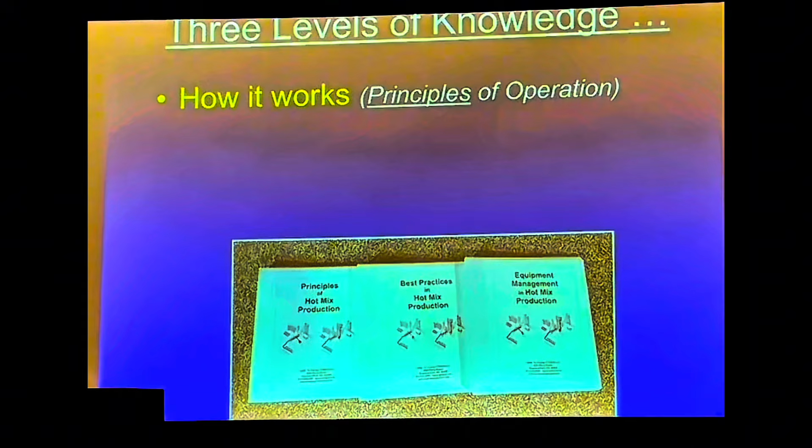The first thing is, how does it work? That's the first book I put together a number of years ago, Principles of Production. This is how we make that machine. But once you get that under your belt, the most important thing is, how do you run it correctly? Same thing is true with a roller or a paver. It's like, oh, that's how it works. But how do you do it right?

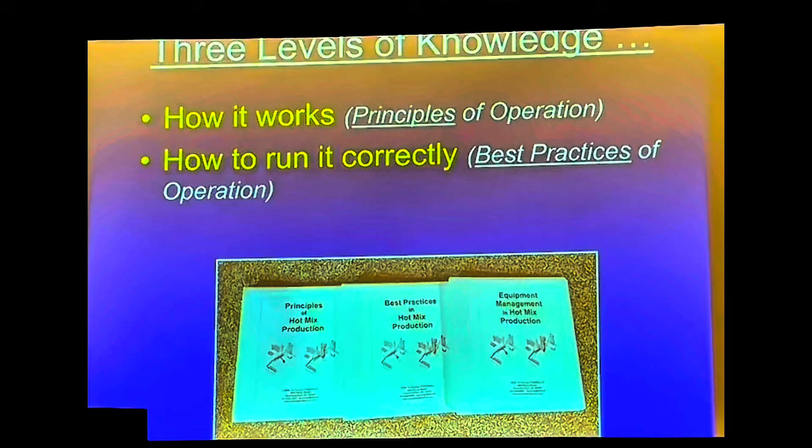What they asked me to do is put a presentation here about our best practices. Brett and I were thinking about doing two presentations. It actually got edited into one, and the second presentation was, how do you maintain it right? Buzz is going to be here talking tomorrow about forensics on pavements. Greg Renegar is going to be here from Astec in the morning on the asphalt stage. At 9 o'clock, I'll be here. I've kind of seen this presentation already about efficiency in production, but maintenance is a critical thing to maintain our efficiency and maintain the thing to operate correctly. If we ignore maintenance, we end up with a quality problem.

I sent Buzz some slides, and he's with the Asphalt Pavement Alliance, and you might know him. He used to be at NCAT at the Test Track. He retired from there. He was working for the Asphalt Pavement Alliance, and he was in New Jersey making a presentation last week about how maintenance can impact mix quality. I thought we were going to weave that into our presentation, so you're going to get a couple shots over the bow later in my presentation on this. Because if we don't maintain our plants correctly, it won't work right.

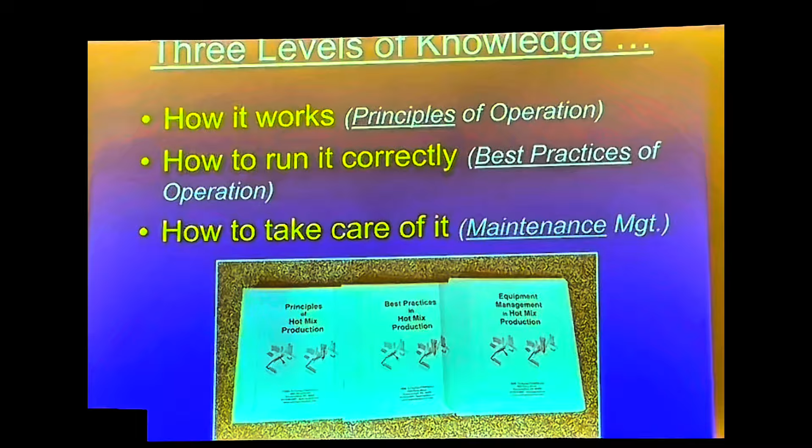So first of all, you've got to know how it works. Secondly, you've got to know how to push buttons right. And the third thing is, you've got to maintain that thing. Otherwise, we're going to have a quality problem. Okay.

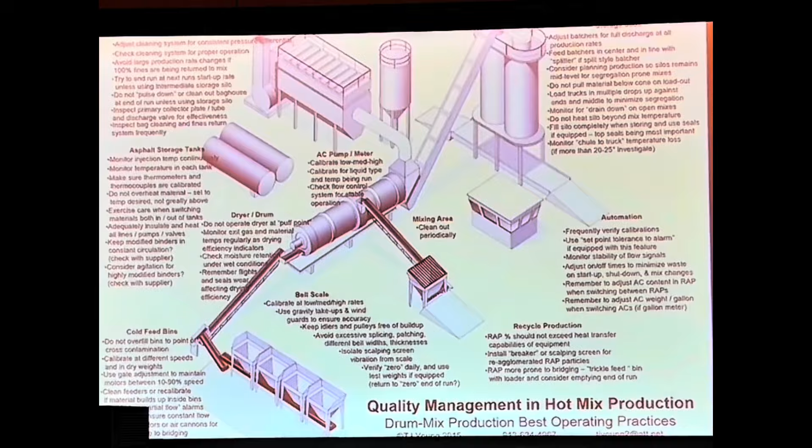Out of that second book on quality management in hot mix production, there's this chart. I think we shared it in years past at the World of Asphalt. These are all the bullet points of making good mix. This is not a 45-minute presentation, but you can see all these bullet points here. You could really spend several hours on this. In fact, I could teach a whole one-day program on quality management and mix production.

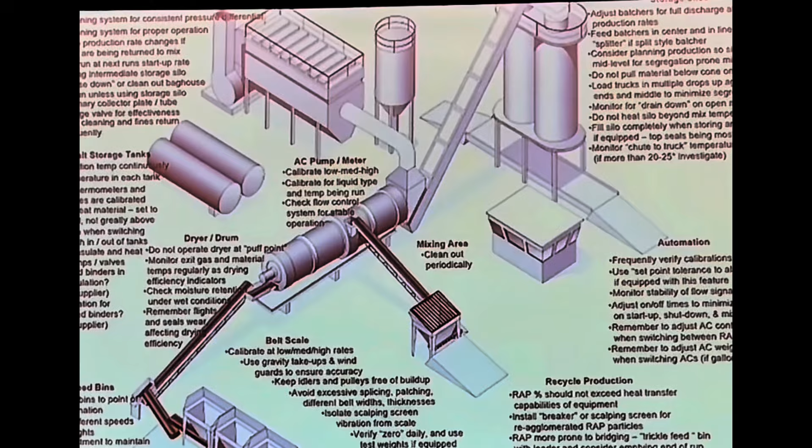Back on slide 3, here's another key thing I think you can take from me. I see one or two equipment manufacturers in the room that build plants. Realize that in mix production, the quality of that production and running that plant right falls into 3 key people. Who are they? They're the plant operator, obviously, but the loader guy is also a key part of quality management.

And the other thing is the person on the ground—also a key part of quality management. Now, this is my crew at one of my plants. I asked them to send me a picture of them, and Rachel, we're not really sure. You're going to say, well, what's the woman doing? We're not really sure, okay? She's been learning how to run the plant. She can run a loader. All of these people can run everything.

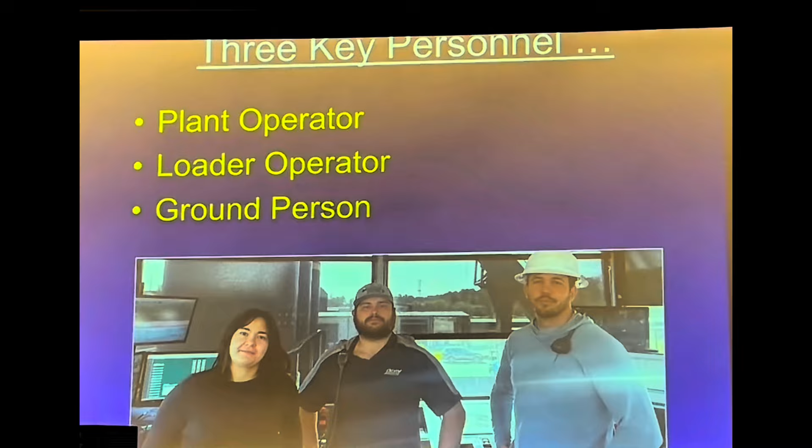We've graduated several women, so there's a plug for women of asphalt here. We've graduated several women through our company. We have a very high percentage of females in our operation in Florida. And they've left, graduated, moved, got married, and they're running plants, running loaders, and even working on the ground at other locations around the country.

This is a really key career. There's only 3,600 asphalt plants in North America. A plant can feed anywhere from 4 to 7 crews. You multiply that and we're looking at over 10,000 paving operations easily, but it's in the hands of those 3,600 plant operators. You learn how to do this right in this program, and—off topic now—but you will never have to worry about working. Most of the people we've graduated, brought up even from 18 years old, are still in the business. It's a good industry. I've been in it for 45 years.

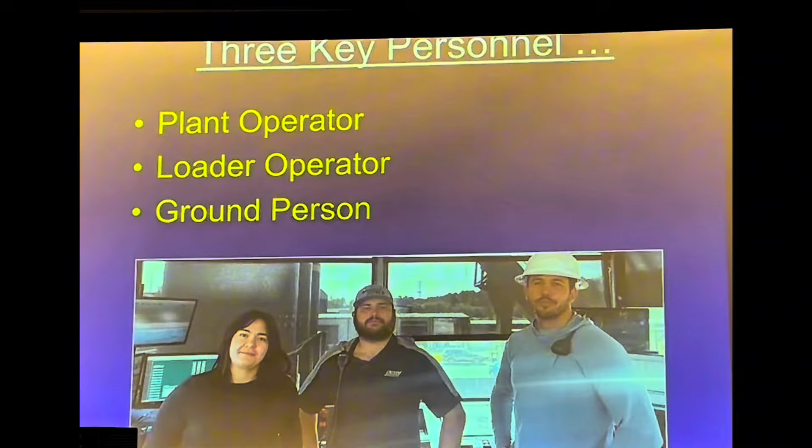Now, those 3 people are going to be responsible for all the best practices we're about to talk about, right? And you can make a chart out of this. The person on the ground is a key person. He's the one watching the machine run, lubricating the machine, inspecting that machine, and he can see things going sideways before the guy at the loader or the plant guy can feel it in his boots.

Standing in a 2-story control house, focusing on trying to load 25 trucks out of 3 or 4 silos—okay, so you can build a case that there's really more than 3 columns. I'm not really sure where the laser is, but I don't think I have one. So there are 3 functions that are critical: watching the plant on the run, what the loader guy's got to play, and the guy on the console. So I call it 'on the console.' He's the mix master. He's the chef, okay? He's the chef.

Loading trucks is a separate function, and a lot of times we use the operator to also load the trucks. I don't like it, which is why we have 4 people in our control houses a lot, because you can't watch the plant run if you're spending all your time serving Cokes in the aisle. And you can spend all your time loading trucks with your back turned, because that's the way we lay these stupid plants out. We have a loading thing over here so we can see the silos, and the burner control of the plant over here so we can see the plant.

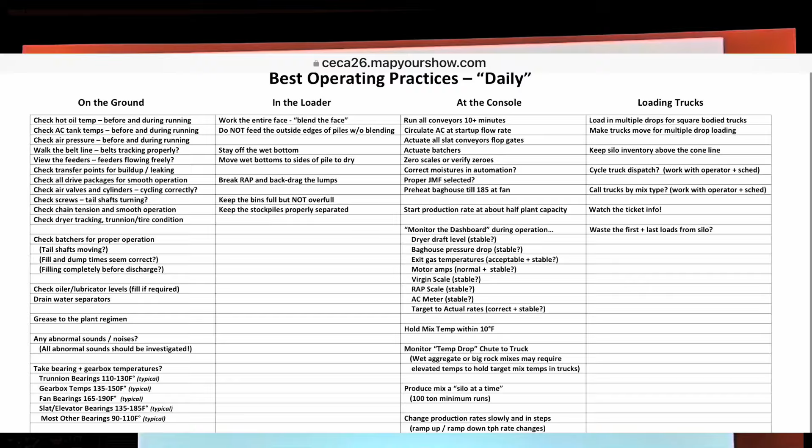So loading the trucks can be really, really hectic, and that might be a key thing you take away from this nugget today: don't get sidetracked by the guy who doesn't know where he's going, isn't sure what crew he's on, isn't even sure this is the right plant, doesn't speak the same language you do, and his credit card doesn't work, right? So you don't have a lot of time focusing on that—that's the real world. And you don't have a lot of time focusing on making quality mix. So we have that chart.

Now, if we make it through 45 minutes to the end of this program—this is an entire other presentation—which is how to take care of the machine.

I try to do everything colorblind here. This is very important to hear. You take this chart on what you ought to look at every day, every week, every month, every quarter, twice a year, and you compare it to your operating manual from Barber-Greene, Cedar Rapids, which doesn't even exist anymore. Almix, we've got an Almix guy sitting here. ADM, Astec, Gencor, Ammann - you're going to see these match.

Unfortunately, in our management world, the people that run these plants - and I've been in this business 48 years, I built plants for 30, I still do, I build custom stuff - they don't read the manual. Not a good idea.

So keep three key things in mind. If you want to keep your plant online, here are three things you can do. Number one, have an inspection program. Forget lubrication - you need to lubricate your equipment, but you've got to look underneath of it, because a machine is going to wear out. Any machine you own is going to have to be managed to some degree from a maintenance standpoint, or you're not going to have a functioning chainsaw.

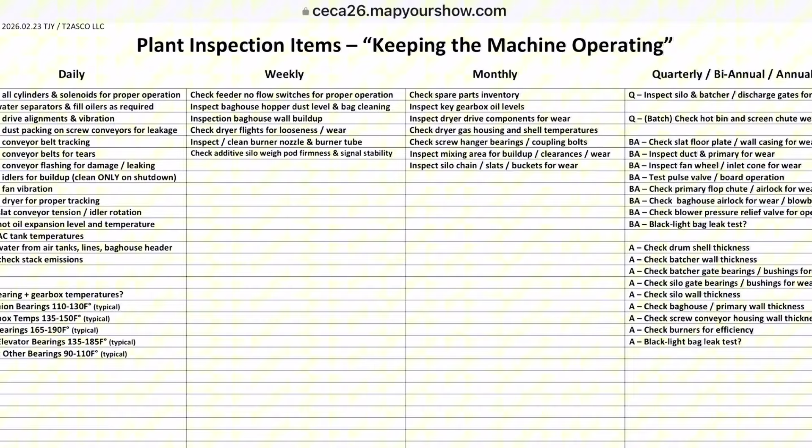Now let's rip through some of the key points at lightning speed on quality management. Start with the rock - the best producers keep the rock properly separated, no cross-contamination, blah blah blah. I don't have time to enumerate these points, but you know this is true. This is what you need to manage.

When things go wrong - and I have a whole other program on this, I think we did it a couple years ago - when things don't work right, it's usually because one of the basics got bent. And frequently, in my experience in this business, it's not just one thing, it's two or three things. So this was wrong, that was wrong, boom - we've got to dig up a mile and a half of road.

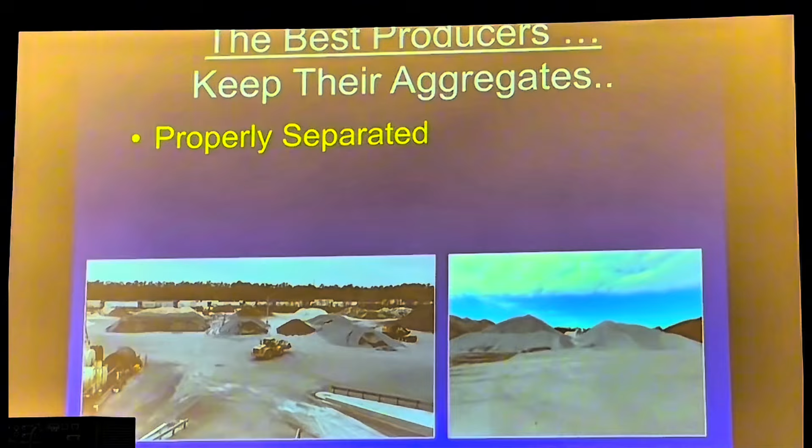So the best practices here are: properly separate the rocks, keep them free of contamination - pictures show how to do that. You want to be on a solid draining surface for a lot of reasons - you don't want contamination from the ground, and you want to get water out of the material. Every 1% moisture reduction is going to be 10% on your fuel bill.

Your fuel bill is a million dollars a year - that's $100,000. Shout out to NAPA, who really sponsored me here. Is it QIP 132 we just did? 132 or 133? So there's a whole publication you can go downstairs and buy, QIP 132.

It's about energy management in your plant facility. Greg's going to be talking about this, I'm sure, tomorrow morning, and some of the slides I have here will dovetail on what he's doing.

Now, when you're feeding the plant, after you've kept it all separated and stockpiled, work the entire face - key point. What that does is it averages out the gradation inconsistency, because you're going to find the gradations are inconsistent. The question is, how inconsistent are they? In other words, what's the standard deviation of our control system? That is critical - here's another soundbite to take with you.

You can't make good asphalt the way we make asphalt in North America, where over 95% of high dollar owner agency work is produced through continuous mix plants. We blend rock, we blend asphalt, we dry, we heat, we hit target temperature, we put it in a truck and pray we didn't segregate it. That's the way we do it in North America. They don't do it in other places around the world that way.

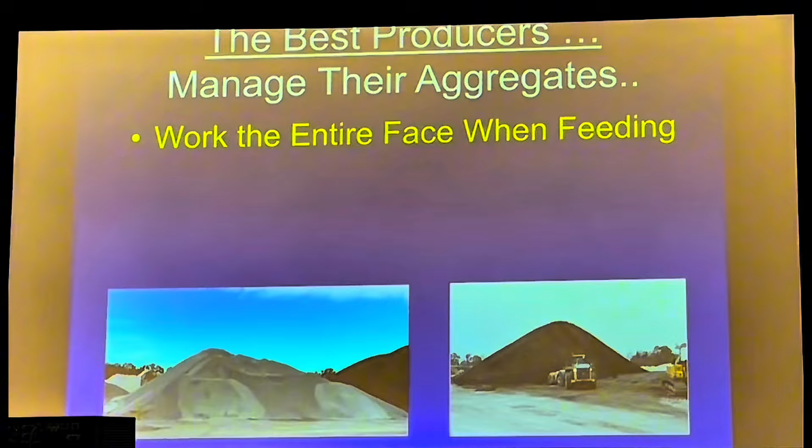The loader guy's responsibility is this, and that's the column in front of you, because I've got to go fast here. So you work the whole face. You make a blend pile if you need to, and what you do is average gradation inconsistency when you make a blend pile. You feed dry material to the plant.

There's an adage: stay up 12 inches. Here's a picture of Papa over here trying to stay up half an inch. I shot that early in the morning, and you only have 1 or 2 loader buckets in there, but he's up about 12 inches on that right-hand picture. You can see the wet line between these 2 rock piles, the 1/4 inch minus and the 3/8 stone. You can see the water, the visual wet part of that pile, where the water is sinking down. You don't want to feed that into your plant.

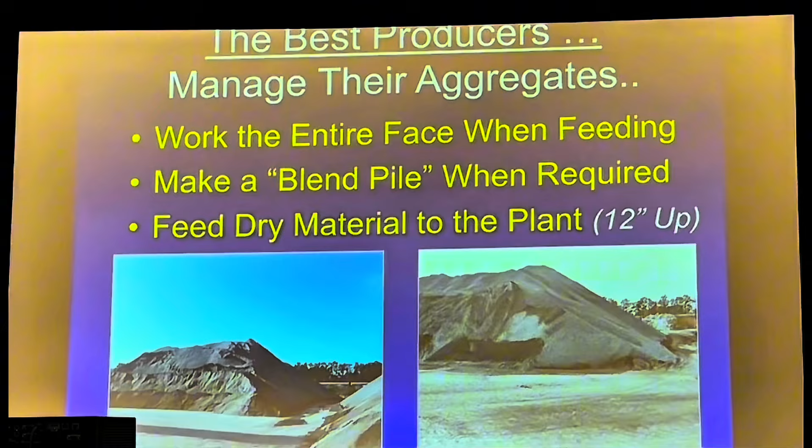This allows us also to control temperature, as you will see here. So the best producers know their aggregates.

Now there's a little sidebar comment here. I know I sound like I'm preaching. Number one, I love asphalt, I think it's a great choice. But I have not learned this myself, this is not my own knowledge. I've been to hundreds and hundreds of plants in Oregon, worked with people, developed programs with them, and helped them troubleshoot issues. This is what I've learned from people that don't have problems. This is your peers being successful, this is what they do. This is not my idea. This is the real world. This is how it works.

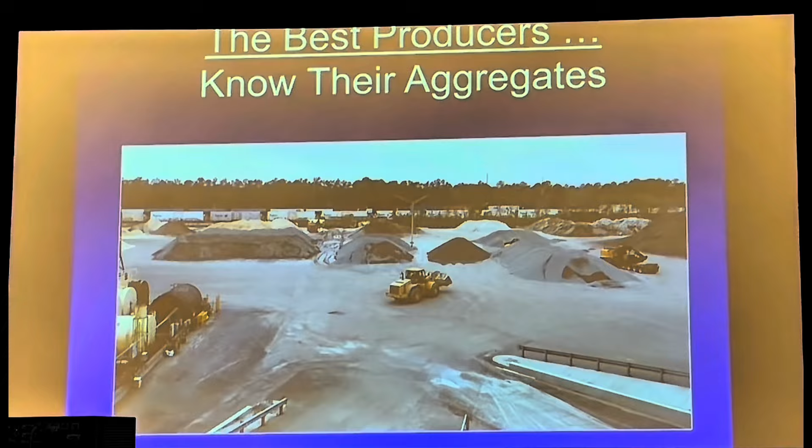So the best producers know what rock they have. Gradation is going to vary. They test material as it comes in, and they separate material into cells. In other words, you use the material into your feed bins, then you know what the gradation is. You don't take brand new material in, throw it in front of the pile, feed it into the plant, and find out you made a bad mix, because somebody changed the screens at the quarry, and the screens are fatter now, and the holes are smaller, so the rock just fined up, right? That's what happens. That's the real world.

You know, just a little funny story on that. We take rock into Florida from Nova Scotia with one of the big aggregate firms, because there's no rock left in Florida, but a couple of quarries down around Miami. And you know, they don't ship in the winter. When are you going to do maintenance on your quarry? In the winter, right? When are you going to change screens? In the winter. So I call Sherry up and I go, hey, there's a ship coming, 60,000 tons of material, you're going to unload it on a wharf wall. And I'm like, you know, and she goes, and she just starts laughing.

She said, I was thinking about you this morning. And I said, okay, I'm thinking about you, what do you think we ought to do? She said, I think we better test this rock when it comes in, because I'm pretty sure it's going to be finer than frog hair, you know? And it did. The control sieve moved 14%, but it's still in spec, because our spec band on aggregate's that wide, and our spec band on asphalt's about this narrow. That's the real world. And I said, yeah, I drove by the rock, the wharf wall, and you got some space, I think you ought to put it in another pile. The half-inch rock moved 14 percentage points between the old pile and the new pile.

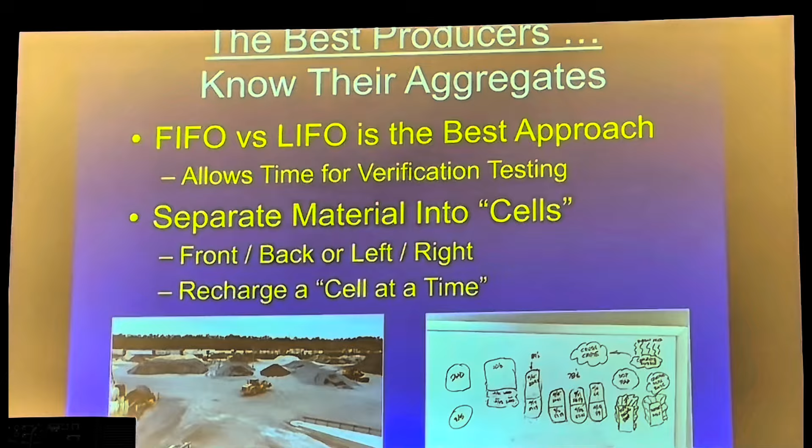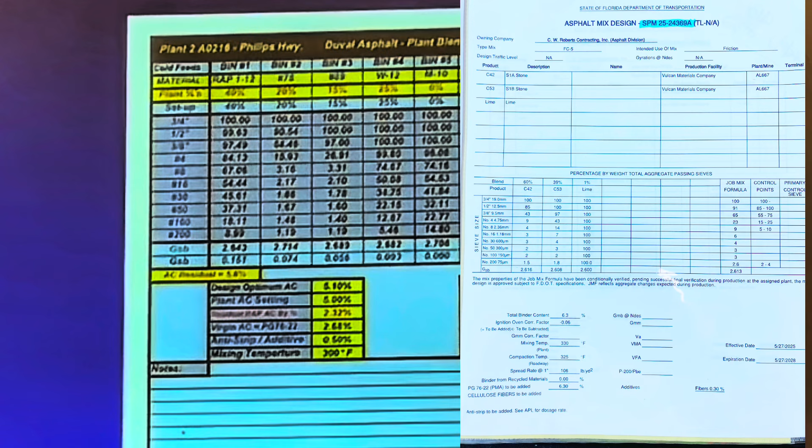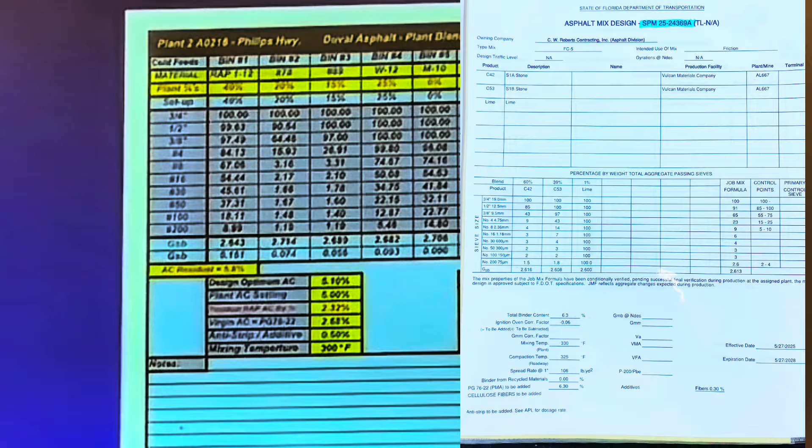Dave and I have an argument about it all the time. I say, Dave, I think we ought to move the blend this way. And he's the mix design guy. Well, why don't we make mix? I go, well, that's a great idea. Let's go ahead and make mix and then find out I'm right. I hope it doesn't affect our pay factor because we're in the bonus stage. Oh, yeah, well, maybe you're right.

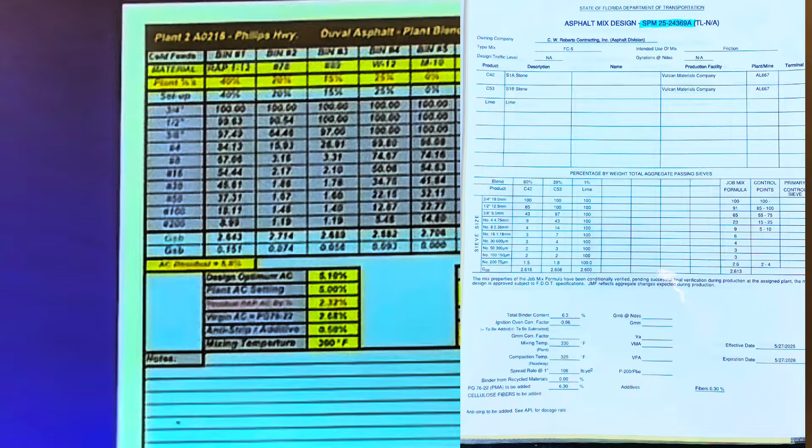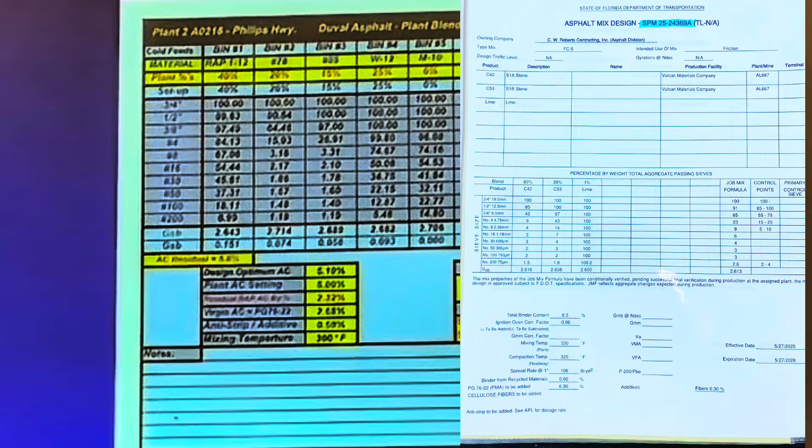You know, because the old way of doing it, because he's an old fart, I'm an old fart, the old way of doing things is you just make mix and then figure out what's wrong with it and then you just adjust the plant. You know, there's an awful lot of plants that haven't been calibrated in 10 years.

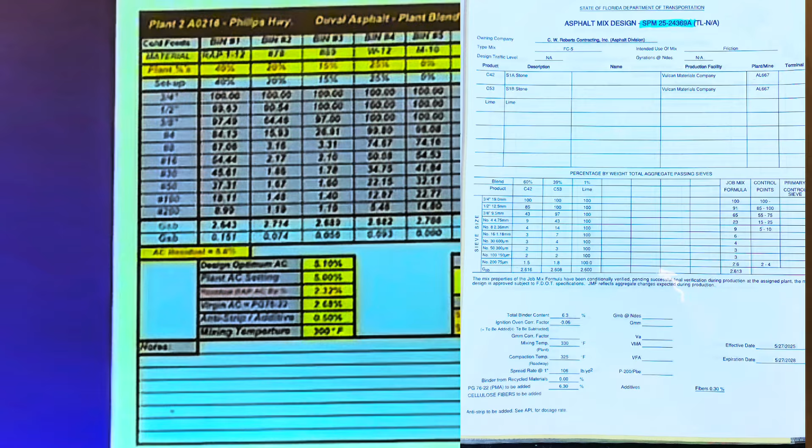This guy's like, what? You start visiting plants and you have a mix problem and you just ask a simple question, when was the last time you checked your cold feed bins? When did you calibrate your cold feed bins last? I don't know. You know, when the computer went out, we had to change the motherboard. You know, they just look at the mix and it's too coarse, so we fine it up, and it's too fine, we coarse it up. That's the way it still goes on in this industry.

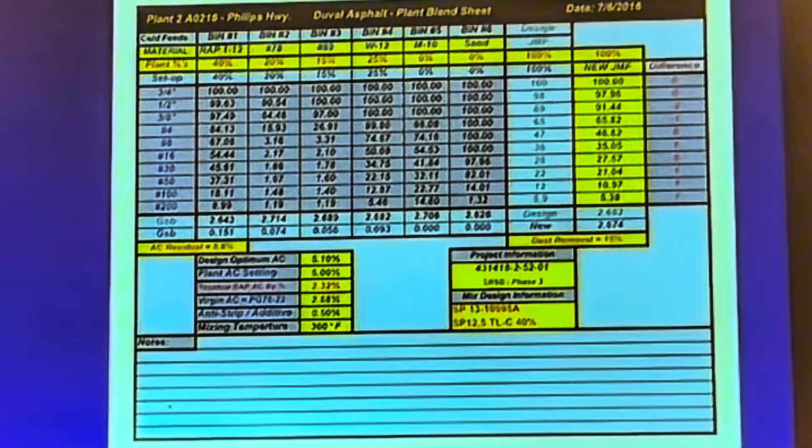That's why you're here at ConAgg. You don't want to be that way. Best producers don't do this. They know what it is before they feed it into the plant. I need to move on.

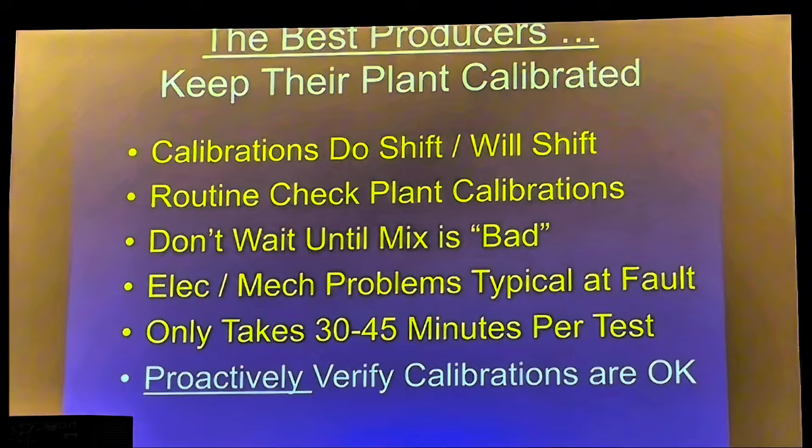Also, calibrations are going to move. They do shift. So the logical idea is to check your calibrations every once in a while to see if they've moved on you. A lot of people don't do that. Best producers do. Okay? So routinely check your plant calibrations. It's on your chart. Don't wait till the mix is bad, because usually it's an electromechanical problem. It's usually the fault of a machine. It only takes 30 or 45 minutes to test it, so being proactive is a great idea.

Picture of that happening. If you're feeding material out of stacking conveyors, I left these in. I wish I could have taken them out for time. But the thing is that they're going to segregate. They're going to segregate by their very nature. Coarse is going to go to the far end of the pile. The fines are going to stay underneath the conveyor.

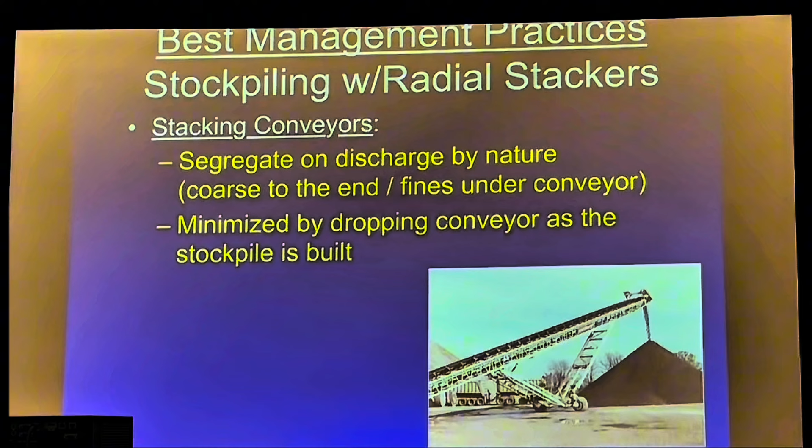So we feed perpendicular to the feed angle. So the conveyor's loading north and south. You're going to feed east and west out of that pile, and you're going to make a blend pile before you feed it into your plant. You know, that's best practice. And you go out there, ConAgg here, and there's billions of these programmable stackers out there to look at. Okay. Now, you minimize the problem that creates by feeding perpendicular to the feed of the conveyor.

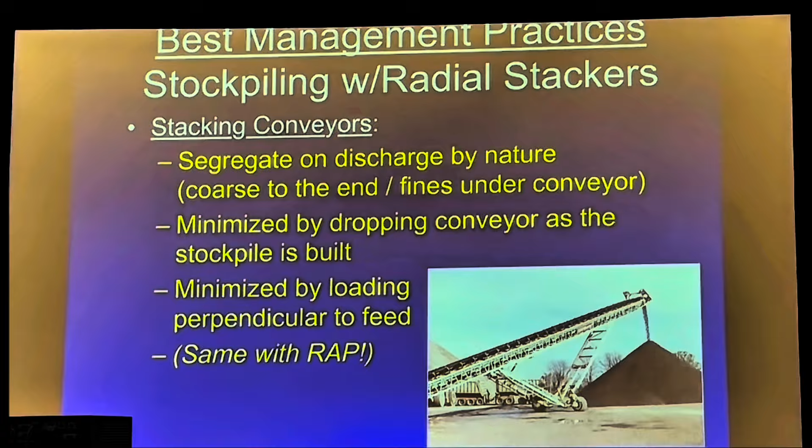Same thing is true with RAP. I left these slides in because most of us are running a very high percentage of RAP now. Asphalt is 100% recyclable. You are your own quarry when you process your RAP. So you have to manage your stackers and your equipment just like you were producing aggregate. As Kenny Monolith used to say, it's an urban quarry. We're an urban quarry. Okay?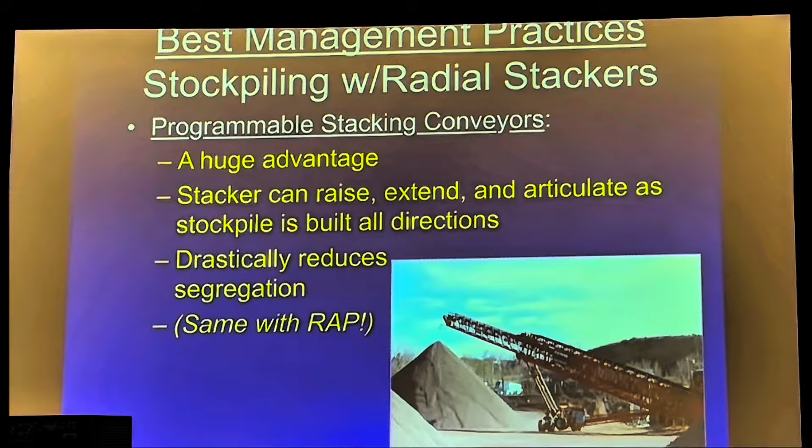Programmable stacking conveyors help because it's a huge advantage for a lot of reasons. You can raise, extend, and articulate it. Actually program a stockpile, minimize your segregation. It only costs you about $500,000. Okay? Drastically reducing the segregation is great. Same thing is true with RAP. You can use anti-segregation head pulleys, which act like little baffles. That helps a lot. It's a big advantage. Again, the point is that you are managing the segregation issue.

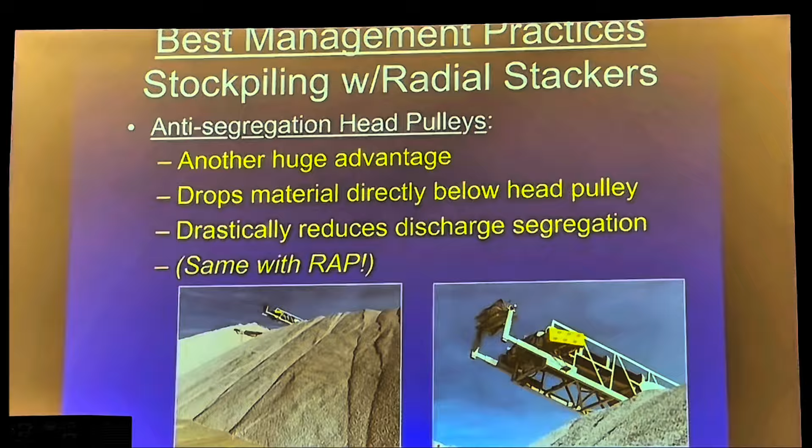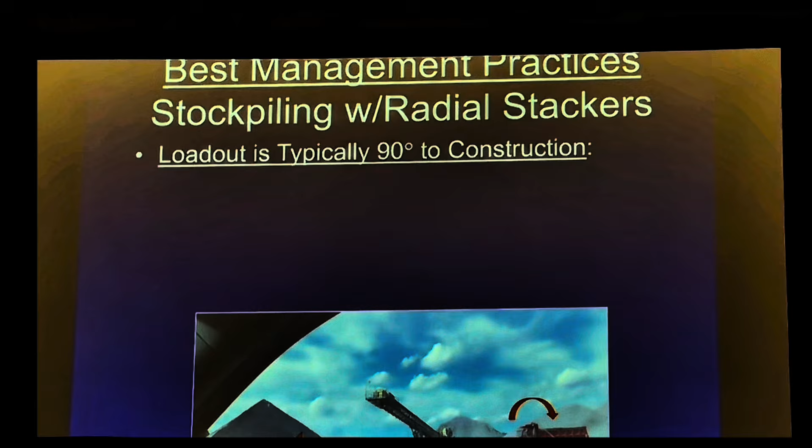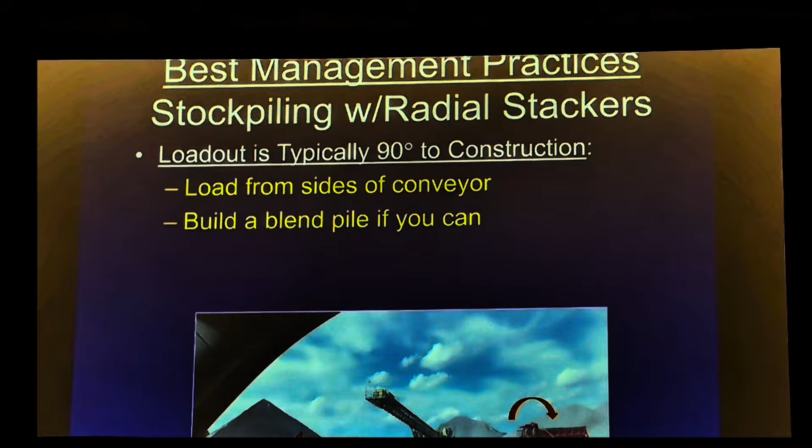So here's a picture of a rock terminal. You can see this programmable stacker is moved out of the way. They've fed that pile this way, and the loader guys load trucks to go to an asphalt plant, working that entire face. So again, working the face, blending the material, chucking it in the truck. Okay? Best practice. Same thing is true with RAP.

So I threw these slides in because here's one of our plants. There's the RAP crusher in the back, it's red. There's the stacker. You can see the direction they're stacking the pile. They're going back and forth like this, you know, as you're looking at the screen.

Those of you who are listening to this can't see this photograph, or maybe you can, I guess you can. But it's going to be in the foreground. This thing is worked back and forth, and then he's laid another ridge in behind that. So the loader operator is going to come in, and see how he's working the face perpendicular to the feed angle. You can see it right there in the picture. Okay, that's best practice for that.

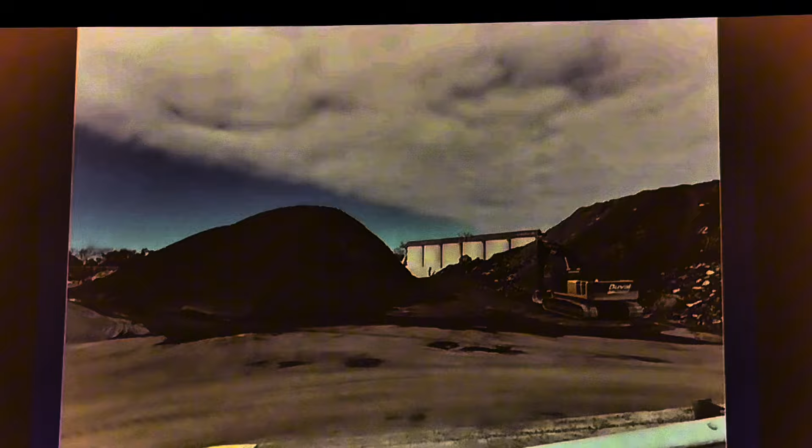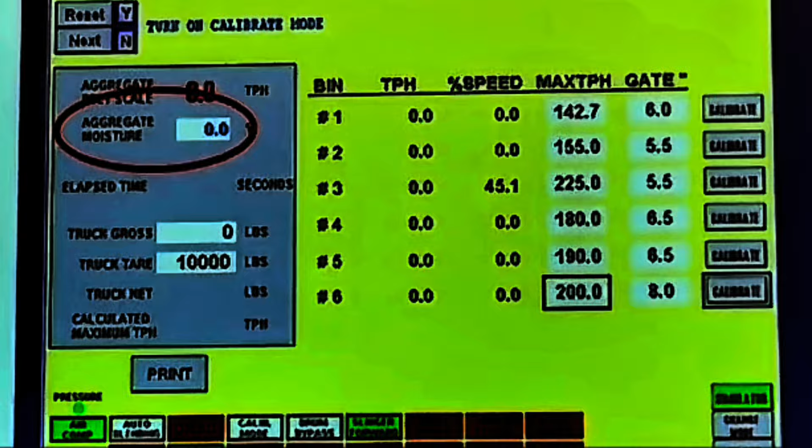Good idea to have dividers to keep from cross-contamination. Best practice: calibrate your feeders and dry weights at different speed ranges. This is important. So if I had to edit these slides down even more, I'd just say multiple point calibration. 3-point calibration should be your minimum on everything. Cold feed bins, belt scales, asphalt meters, everything. Mineral filler additive systems, whatever.

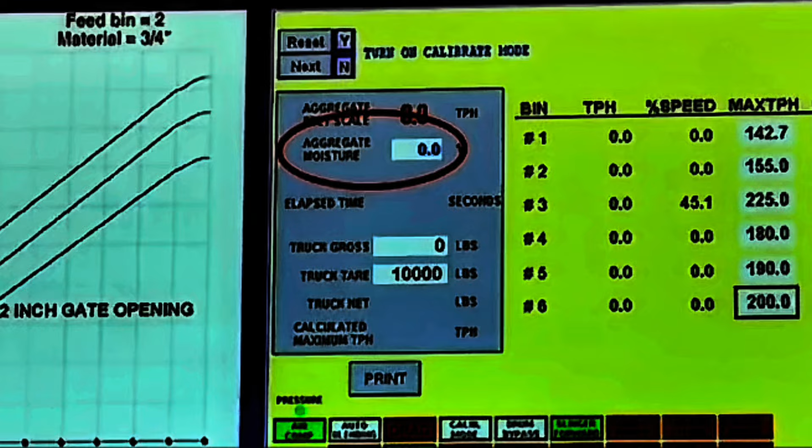Just go out and ask all those manufacturers if 3-point calibration is a good idea, and they're going to tell you yes. Best producers do 3-point calibration. Other people just do 1-point calibration because it's usually linear, so why bother? I've heard this out of the mouth of people that work for me in 7 plants. We don't do that because if 25% feed gives you 25 ton an hour, 50% feed gives you 50 ton an hour, 75% feed gives you 75 ton an hour, it's a 45, it's a linear function. And so the computer can interpolate between those points.

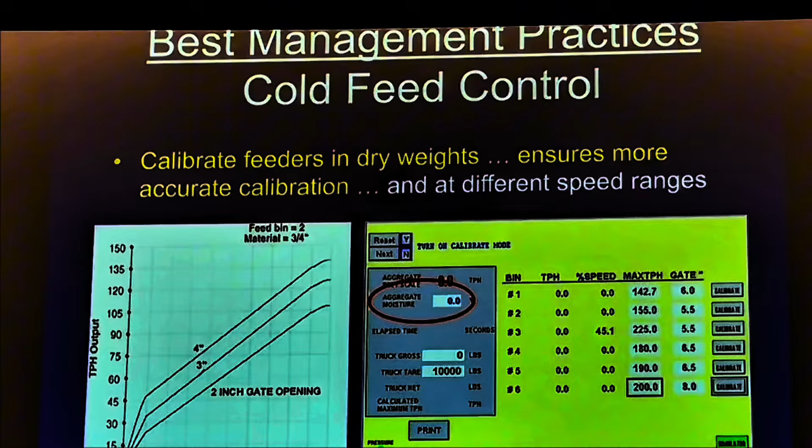A lot of computer systems, when you calibrate it, give you a graph. Those are the ones I like. If that graph is not on a straight line, you've got an electromechanical problem. Go fix it. Because it might be that you run the plant right where that hiccup is, and it's going to affect your mix. Proven linearity on all of your mixing ingredients gives you good mix. And I'm spending some time talking about that because there's going to be slide after slide coming up on belt scales and feeders on the same point. I can skip over, okay?

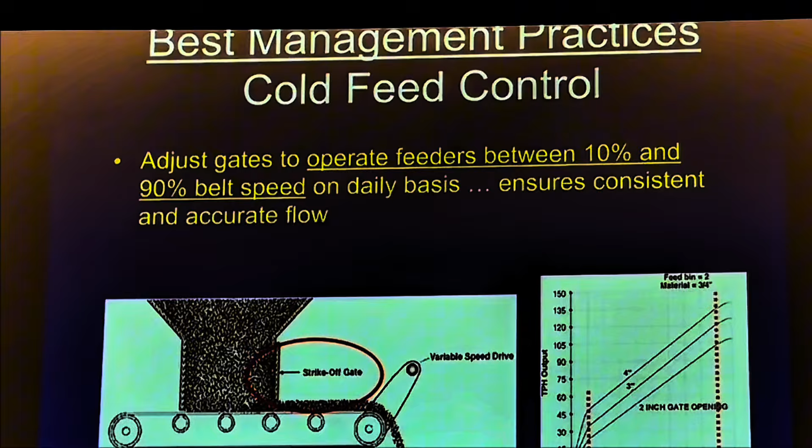Try to run your operations so that you're operating everything between 10 and 90% speed. Things don't like to go super slow, and they have a tendency to flatten out on the high end. It's better to stay in that linear range, which is what you see on the screen. Okay? Best producers do this. Make sure your on-off times are set right in your computer so your mix, when you fire it up and it comes off the end of the belt and goes through the drum, it's good. Okay?

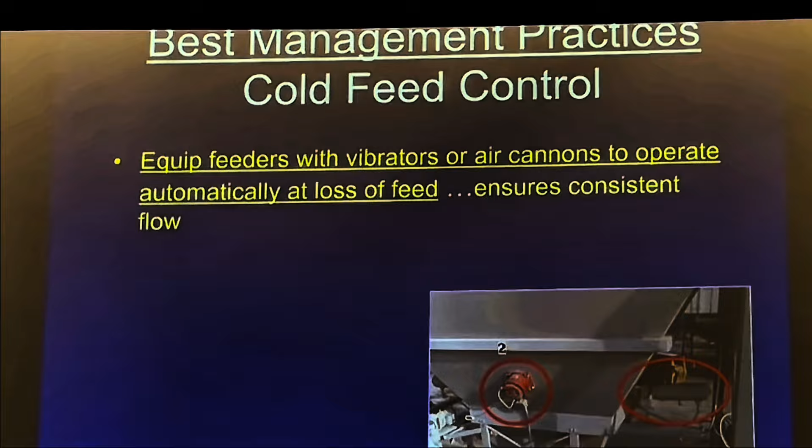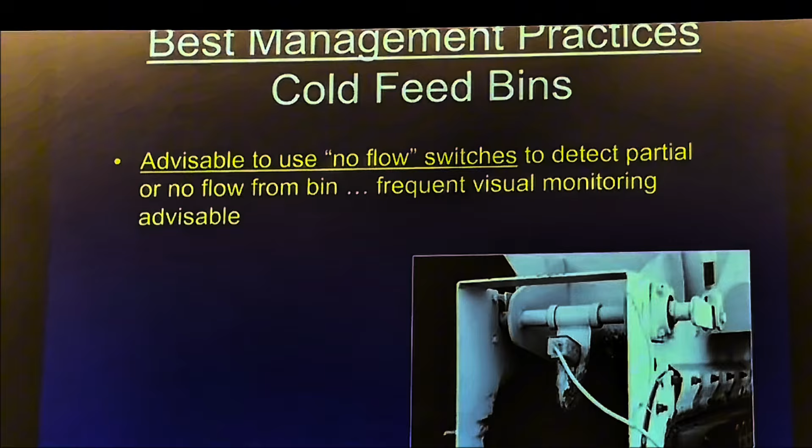Vibrators and air cannons in case you have loss of feed, making sure your no-flow switches work. Whose job is all this? The guy on the ground. The guy on the ground is going to watch the feed and keep an eye on everything, and the operator, because if he hasn't turned off all the automation, he can see it working correctly. Daily monitor the feeder flow just to make sure it's working right. That's the ground guy's job.

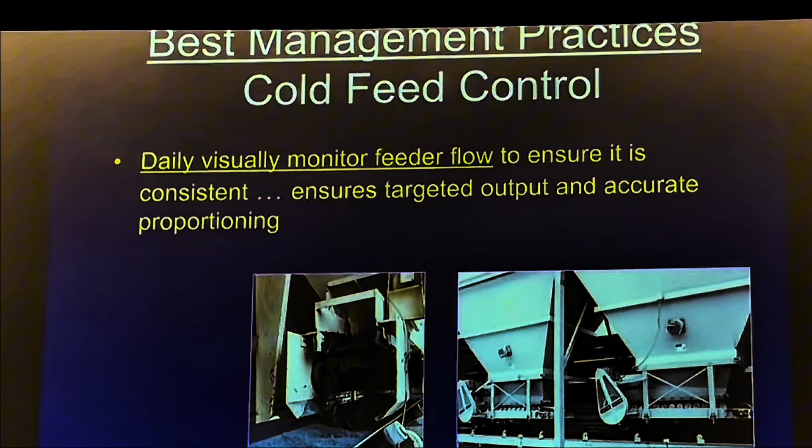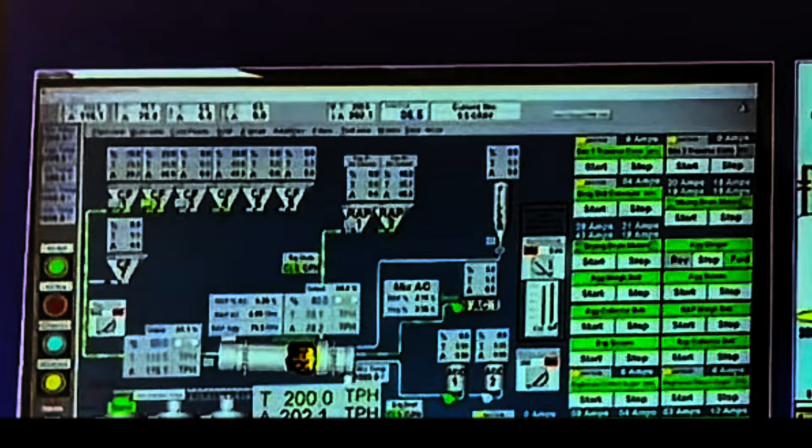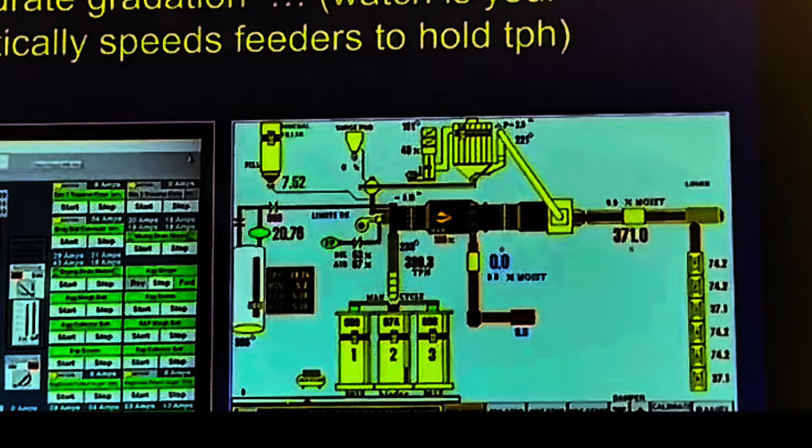Use set point timers to alarm if the control systems have it. I got news for you. They all do. You look on the left on this screen here, they're running that plant at 200 ton an hour. The green thing says 200 ton an hour with a T, target. The actual is 202.1 with an A, actual. If you put in 200 ton an hour and you get 220 ton an hour, you've got a problem. And the lab's going to call you up and go, your mix is not good. Okay? And so they're there for a function.

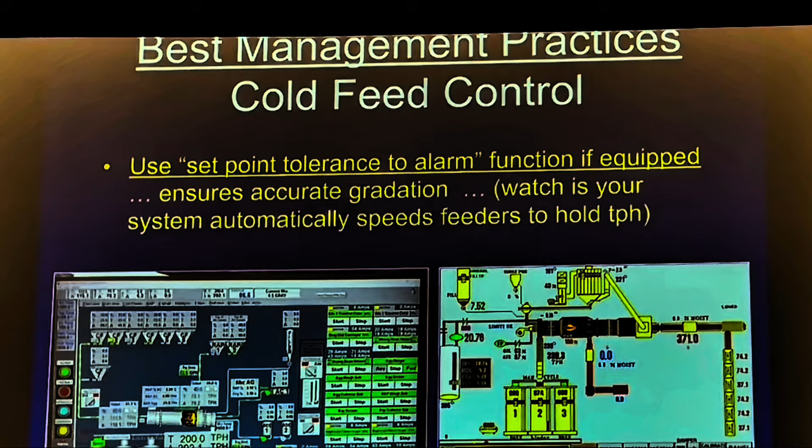The reason I'm stressing it is because operators like to turn these off. When I set up, I fired most of the people that I inherited when they asked me to run the company. One guy signed his death warrant the day that we had bad mixing and I went to the control house, and I'm looking at the screen, the alarms are turned off, and I'm like, your speakers are unplugged. He goes, yeah, it keeps barking at me and it bothers me. I'm like, really? So I go over to the alarm screen, and there's 15 alarms in the alarm log. I'm like, dude, they're there for a reason. And I'm stressing this point because it's very common. I've audited over 600 plants in detail.

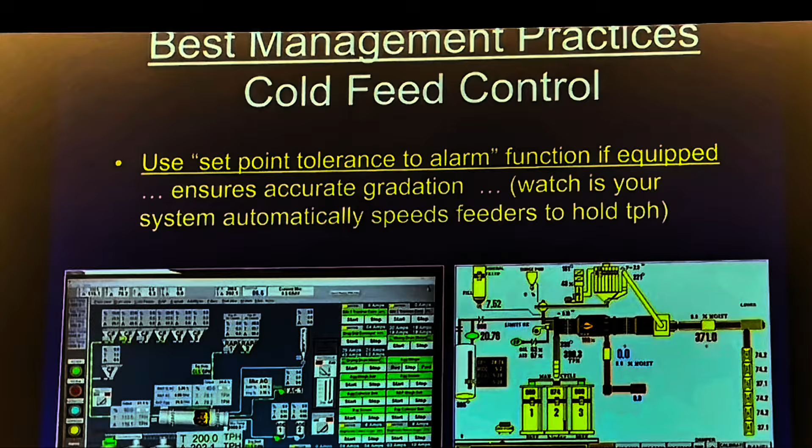I have a 45-page document that I do this with, and I've helped other companies build those inspection programs. We internally audit once a year, and it's very common for people to turn this off, and it just leads to it not working right. Okay. So good producers use set point tolerance alarm. They check their feed bins frequently.

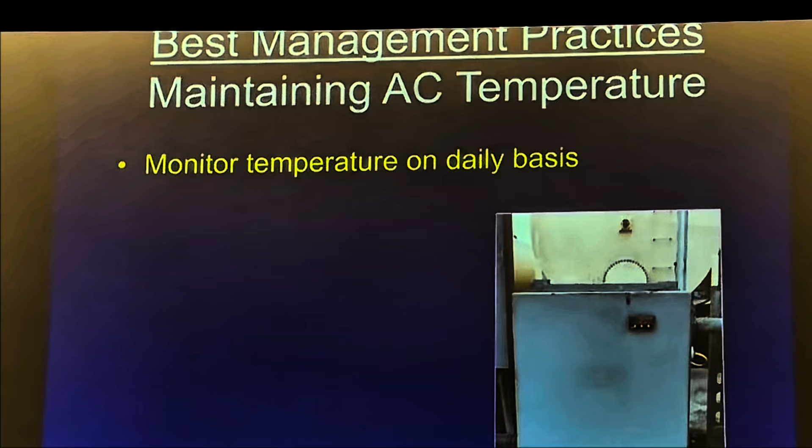Storage, key points: monitor your temperature. Whose job? Ground guy. Monitor the temperature in every tank. Here's a picture of a tank, and on the left of the screen it shows the actual temperature. The other picture I had there is the hot oil heater system, an independent verification of the hot oil temperature external to the heater system, so that you know the heater system is set here and the actual hot oil temperature that's going throughout the plant facility is what you want it to be.

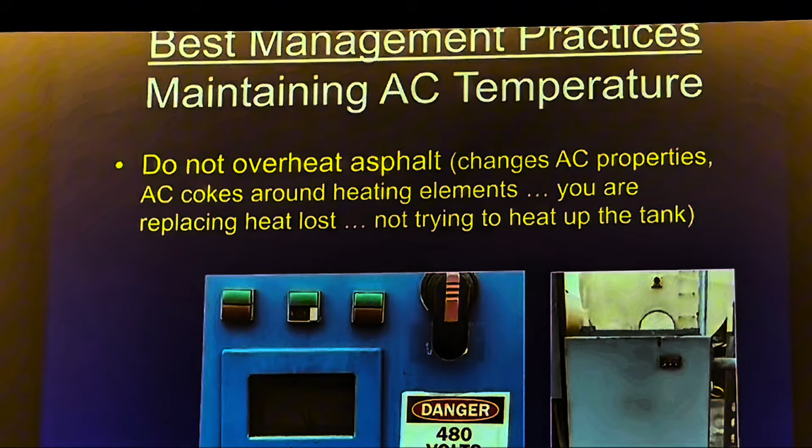Because we have to maintain liquid asphalt at a proper temperature to get proper coating. So you bring aggregate to the proper temperature to get proper coverage. Asphalt control then is two things. Write this down if you haven't got this memorized. Asphalt only comes from two things in continuous mix plants: belt scale and a meter. Okay? Gradation is a calibration thing for the feeders. Asphalt content is belt scale and meter.

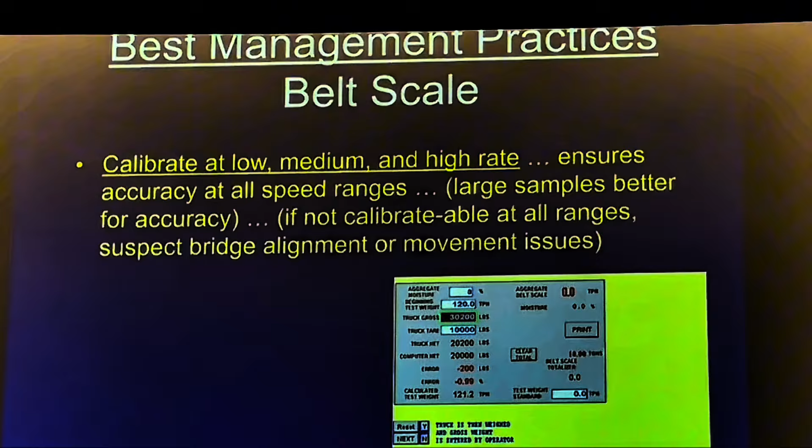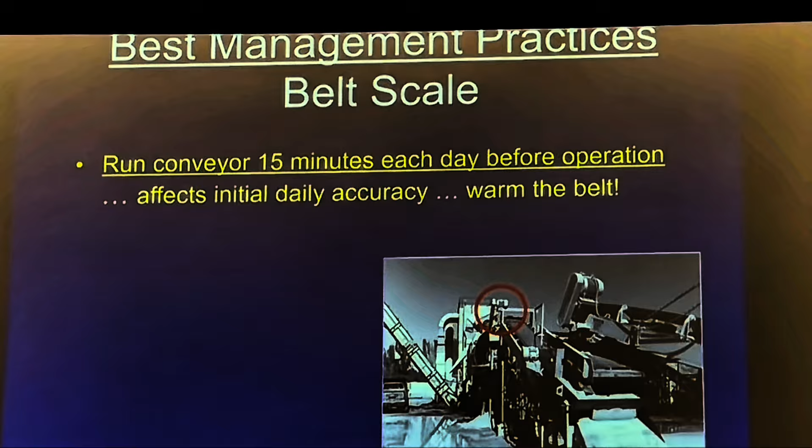Okay? So there's some best practices on the scale. Keep pulleys clean of buildup. Run your conveyor every day. Why? The speed changes. You know how long a 100-foot belt stretches in the first 20 minutes of operation? Over 8 inches. Whoa, that's why we have gravity take-ups to maintain a zero. So we want to make sure we got a zero when you start in the morning, and you want to make sure it goes back to zero.

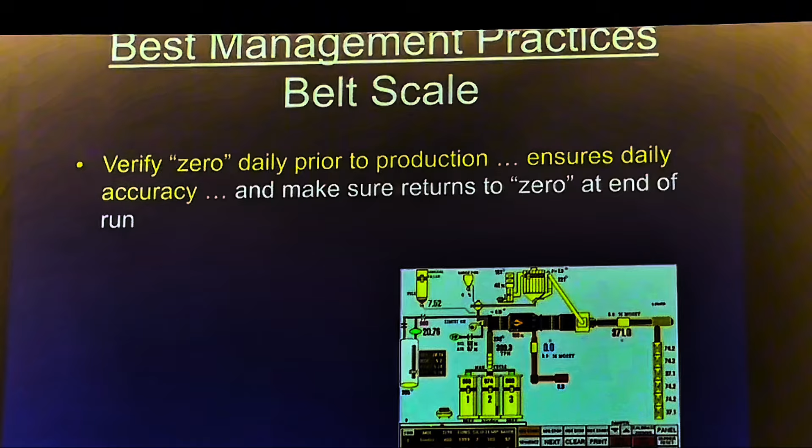If you get buildup on your belt, it doesn't go back to zero. Your asphalt's going to be high throughout the day because it's measuring the weight that's not going into the dryer. Very common problem, okay? And it's part of our troubleshooting series. Use test weights if you have them. That tells you your scale's working right, okay? And recheck your calibration. Low, medium, and high rate again, all right?

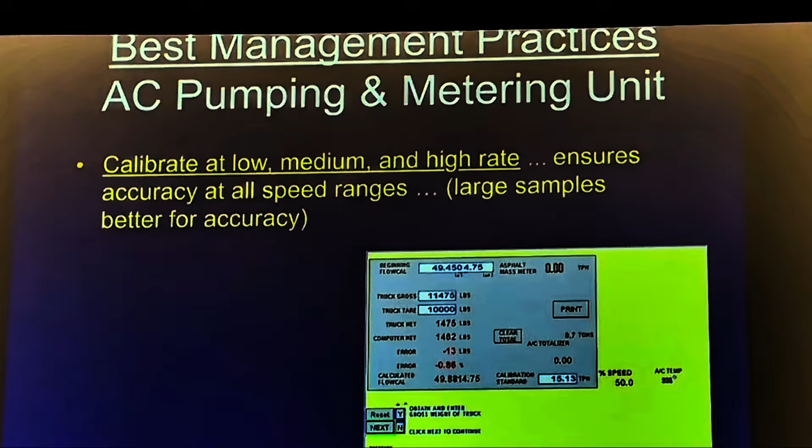So this is back on the pumping system. Again, low, medium, and high rate calibration. Make sure it's linear. You check your feeder calibration. Frequently recheck it. And realize that different asphalts go through the meter differently and may have different calibration factors. If you're not plugged into this one point, then I don't know what you paid to come into this room, but just multiply by 10. That's the value of that one thing.

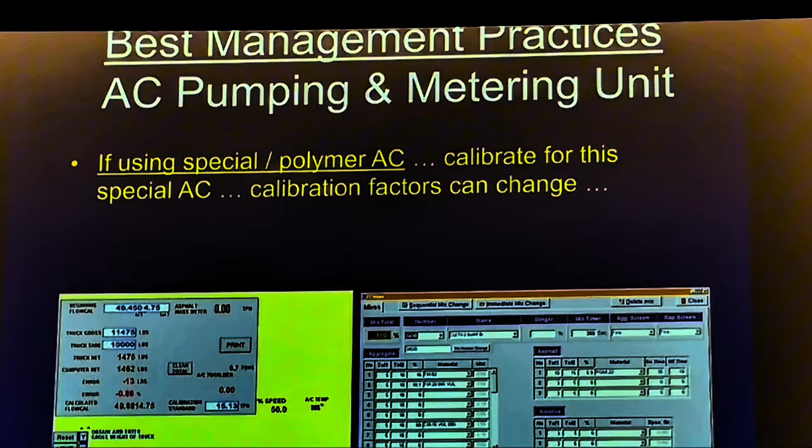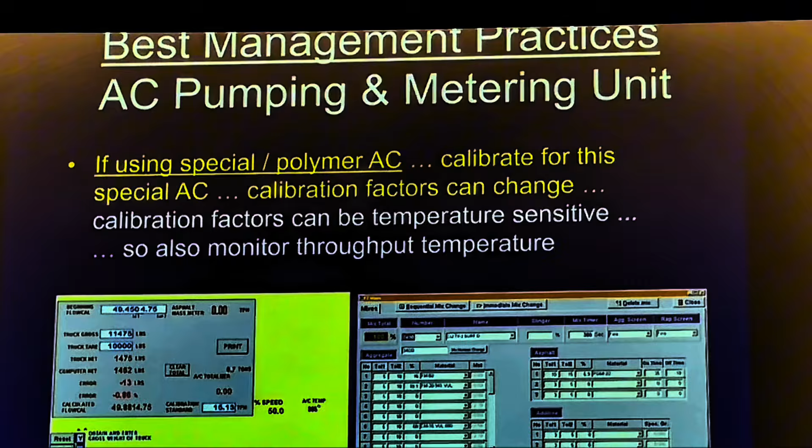As we go to high polymerized asphalts, as we change our polymer in our binder, it actually changes the way the meter measures. Okay, and so you need to be savvy to that. You want to check your meter calibration for the liquid you're running at the temperature that it runs, because they're frequently temperature sensitive. In other words, you take a high poly binder and you calibrate it at 285 and 325 and 345, and you're going to get 3 different calibration factors through that meter. So you better know that if you're trying to control AC within a tenth and a half, which is what all of us are trying to do, right? These are best practices.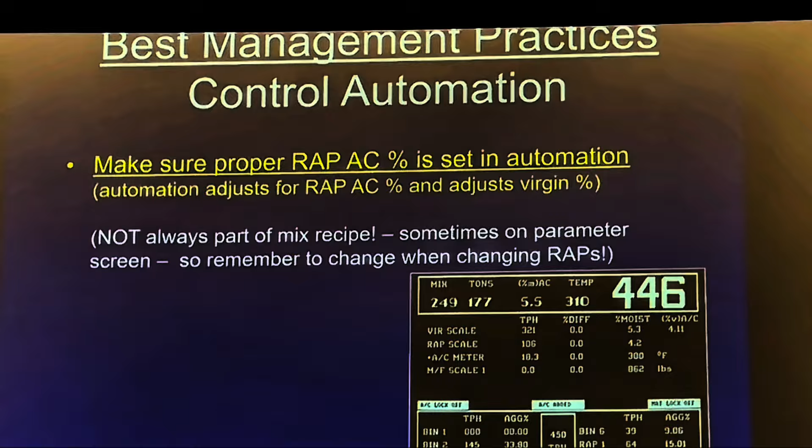I said it wrong. So the AC will change in different fractionated RAP piles, and sometimes you have to tell, depending on the automation you have, I change piles and the asphalt contents differ, because it's going to weigh the RAP and it's going to say, this is how much moisture is in there. It's going to take it off, and this is how much AC is in that black stuff to control the other liquid. Target to actual again is really important. Stability of the flow signals is really an important thing. This is an example. I'd love to spend time with you on that, but we don't really have time.

If you look at the bottom line, this is a simple technique you can do yourself, which shows you on this example that the asphalt is moving in the mix, actually moving during production 3.1%, because the RAP scale has got built up on the head pulley, and it's moving 9%. The virgin scale is not. You clean the RAP pulley off and your asphalt stabilizes. It's all hula dancing together.

So these are the things that producers that are good at what they do keep an eye on. If you look at the chart in front of you and look at the operator, you're going to see these points listed. You go through this knowledge, and you go, oh yeah, this is something. You look at that chart and say, just do these things, and we're going to be okay. And when it comes to maintenance, just do these things, and we're probably going to be okay.

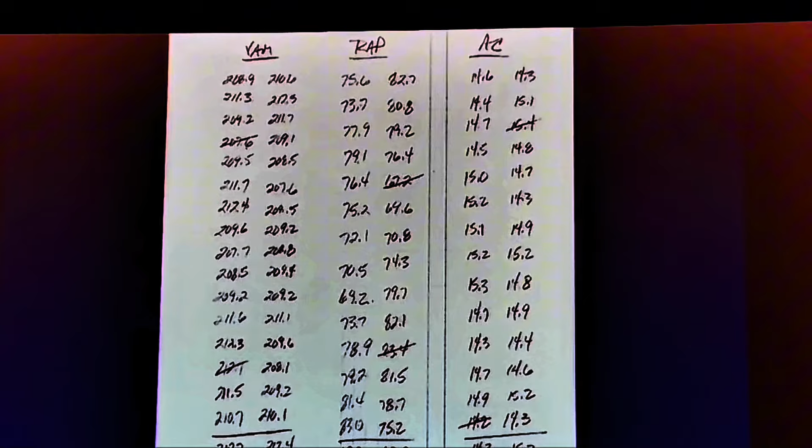I have no idea. He's looking at his watch, where I am.

Now, don't bounce between mixes rapidly: three loads of this, three loads of that, over and over. These are continuous mix plants, they're supposed to be run continuously. It takes time for the plant to level out. You're going to have to stagger your start times for different mixes. Try to produce a silo at a time, at least 100 tons at a time, because there's going to be a crossover mix. You're not going to shut the plant off, you're just going to switch mixes and keep going, silo to silo to silo. These things are designed to run continuously. Run them continuously, and manage your schedule so you can do that.

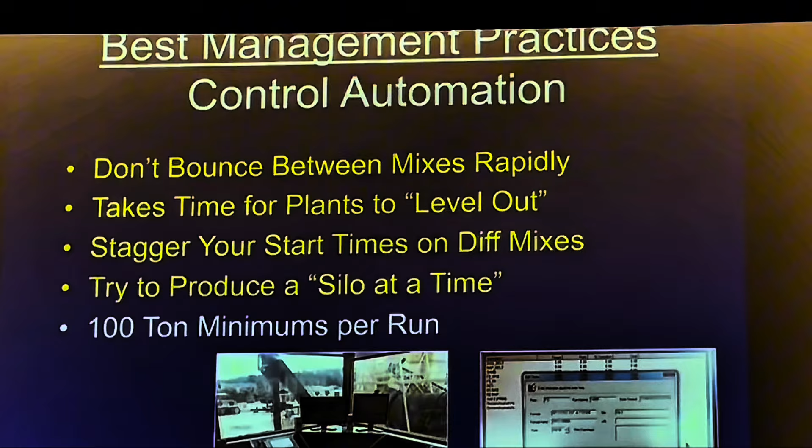And that's not the plant operator's responsibility. That's the scheduler's, and management people need to be in the room to hear this one. How many management guys do we have here? Okay, so you know what I'm saying, it's somebody else telling them what to do.

Don't raise and lower your tons per hour rapidly. If for no other reason, it takes time for your baghouse fines to go to your dust collector and come back. The time delay is 20 to 40 minutes. The bigger the dust collector you buy and the more screw conveyors you have, the longer that time delay. So you run at 300 tons an hour, you jump down to 250, you're still putting dust back into the 250 ton an hour mix at a 300 ton an hour rate, and your voids are going to collapse. Or you go from 200 to 300 by putting in the same mix formula and calling it something different, then initiating a change.

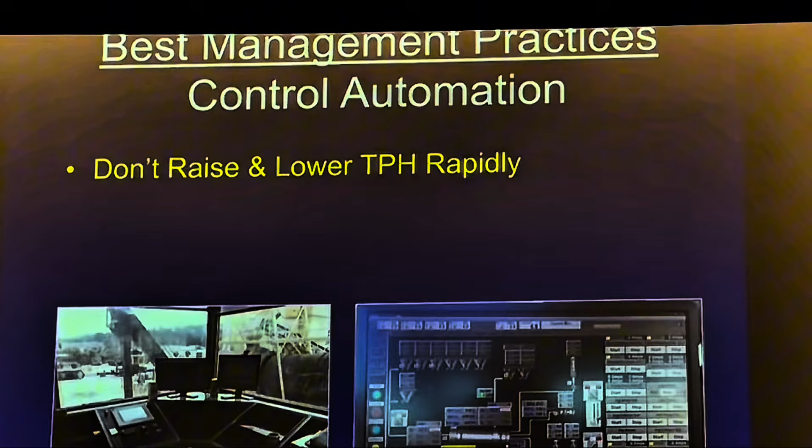Aren't I clever, right? And they all know how to do this. Dust is coming back at 200 tons an hour into your 300 ton an hour mix, and you're going to be short on dust, and your voids are going to open up. That's not quality management. So don't raise and lower your tons per hour, it takes time for everything to level out.

Steady running produces steady mix. Memorize that: steady running produces steady mix. And we all know this, because when we're in trouble, what do we do? Don't change production rate, don't change mixes, don't change temperature. Just run it and sample a couple loads and see if they're not the same. Somehow magically it just sort of helps, because these plants are designed to run continuously into a schedule. And we're just now beginning to wrap our head around it.

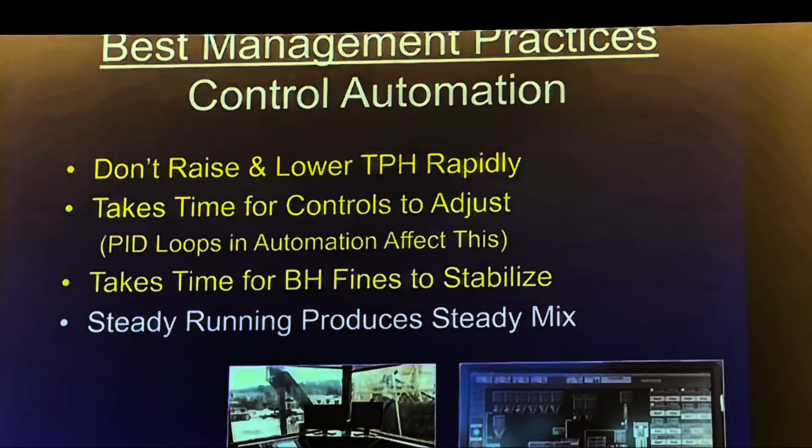Also, control your mix temperature plus or minus 10 degrees, don't work with the minus. Usually we get a 25 or 30 degree range to be in tolerance, same as aggregate. That's just the acceptable range you can go out at. That doesn't mean you can go minus 20 and plus 20 at your target, because the field guys are going to have to adjust the density and their rolling pattern, and it's going to flow through the paver differently.

Everything's going to change in the field, and field density is what's really important. You're the first step for field density. Control your temp - who's going to do that? The guy flying the plane and the guy feeding the rocks in the bin. Stay up 12 inches, feed consistent, work the face, steady as she goes. Treat it like a barge going down a river, not a speedboat. Hold that temperature, hold that rate.

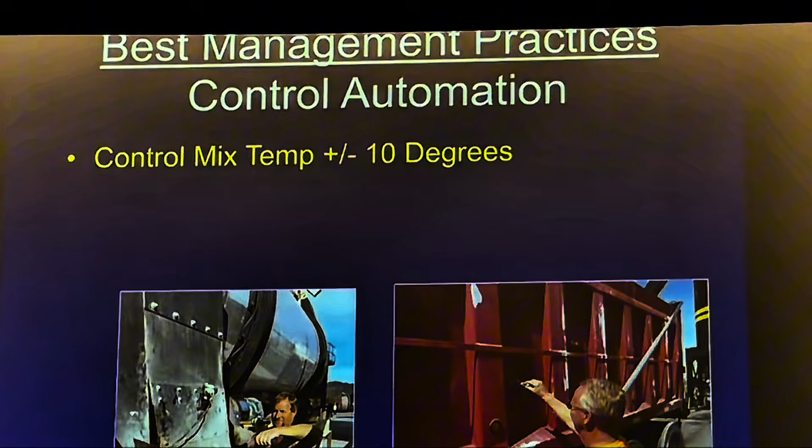You check your rate, you've got to adjust your burn. Run steady, run easy, steady hand on the wheel, and you can get bonus, and they can get bonus, and smoothness out on the road. Okay? And that's what all these bullet points say.

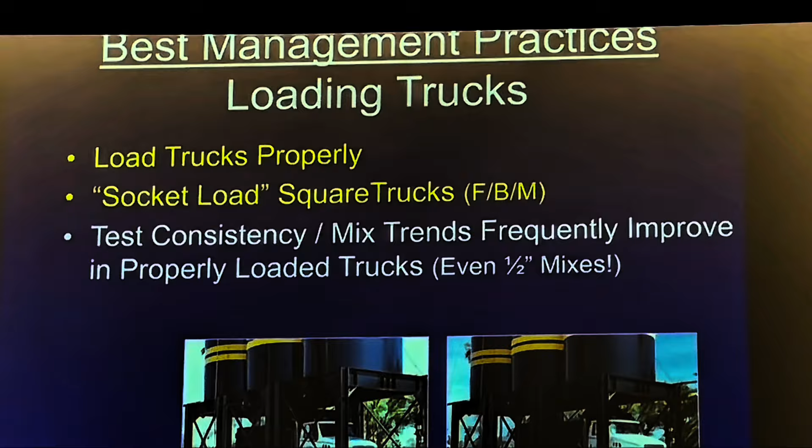Load trucks, load them right. Square body trucks, it's a good idea to go front, back, and middle - socket load in the truck, I call it. Mix consistency and mix trends frequently improve when you load the trucks right. I've proven this, I've been through wars and hell, even on half-inch mixes. A lot of people say half-inch mix won't segregate. Yes, it will. And if you're chasing bonus, you want to load trucks right, no matter - there's a lot of different kinds of trucks in the world.

Now, testing mixes - should you test them every day? The guys that are good do. They test mixes every single day, private or state or owner agency, because the guy that's building a new mall is just as interested in a 20-year pavement as somebody building a freeway.

Test and track your mix trends. We sell a lot of private mix - three reasons. We are the highest price, by $10 to $15 per ton. Why do they come buy mix from us, FOB or sales? Because the mix is consistent, the mix temperature is consistent, we test every single day, and producers that are big into really improving their quality of business.

Okay, every day - so the mix is a consistent mix at a consistent temperature. And the third thing is service. We call trucks underneath the silos. We don't let guys get in line and then tell us what to do. They are not in the yard more than 10 minutes, no matter how many trucks are there, because you can't pave 15 trucks in front of a paver anyhow.

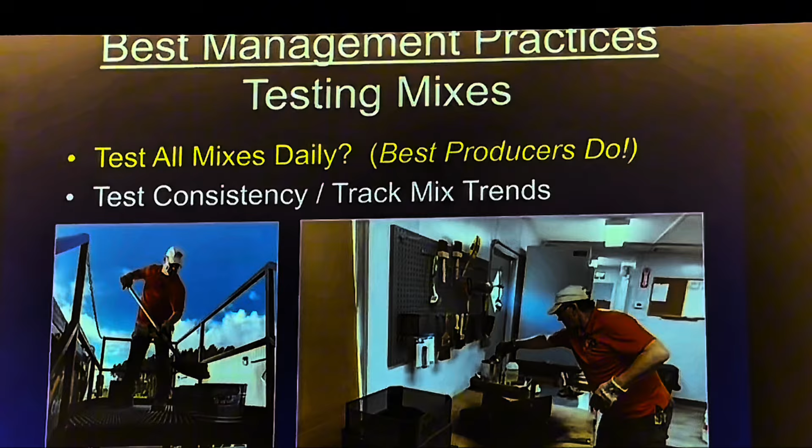So with the apps we have now, we know our own jobs, how many trucks are in front of the paver. We'll make sure everybody's got mix, and we're managing the dispatch, and the guy gets waved in. So they come in, pay with credit card, get loaded within 8 minutes - that's our target. And it works, right? So consistency of quality of mix is very important. Now you've got your data of your mix.

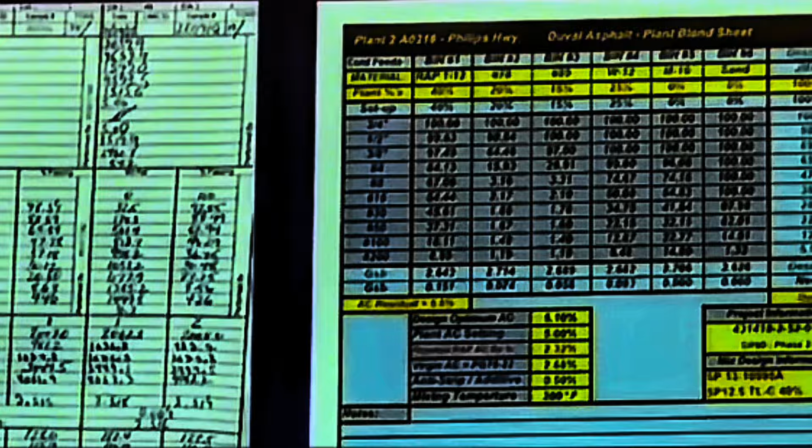The last thing is making mix changes. How should you do that? Wait, look for a trend. Don't make jackrabbit mix changes because there might be something happening, an abnormality, right? Wait till you see a trend. If there is no trend, it's segregation.

Send trucks - load 12, load 14, load 16, compare results. If you ran steady in the same mix, didn't change production rate, there isn't a person in this room that doesn't think those mixes are identical. They might be bad, but they're equally bad - you go fix your problem. If they are not equally bad, you have a segregation problem.

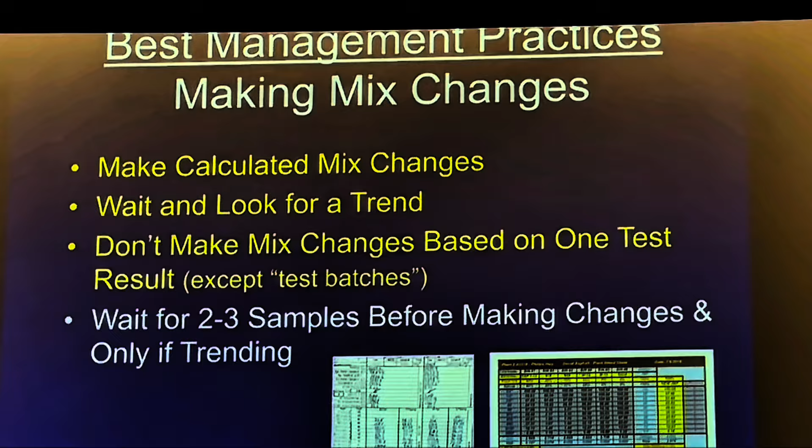So don't make a mix change just on one test. Wait for 2-3 samples and then make a change when it's trending. The rest of this is the maintenance part of the program - you've got the list in front of you. There are some examples about mix problems that result from maintenance issues. One is your dryer flights are shot - can't dry rock, can't hold consistent temperature. Another is your bag house is not working right - you're over dusting or under dusting your mix, not because of the guy flying the plane, but because the machine isn't functioning right. Those things are listed in that chart in front of you.